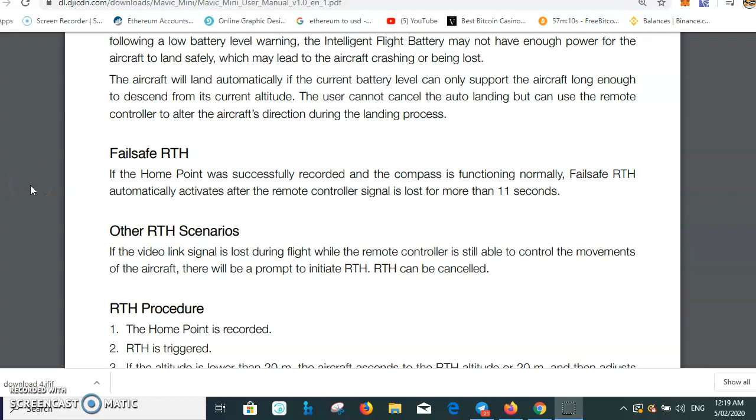Now the next one is the fail-safe RTH. If the home point was successfully recorded and the compass is functioning normally, fail-safe RTH automatically activates after the remote controller signal is lost for more than 11 seconds. I've actually tried that myself, turning the controller off and timing it. It was pretty close to 11 seconds and it did return home, so the function works.

Other RTH scenarios: if the video link signal is lost during flight while the remote controller is still able to control the movements of the aircraft, there will be a prompt to initiate RTH. RTH can be cancelled.

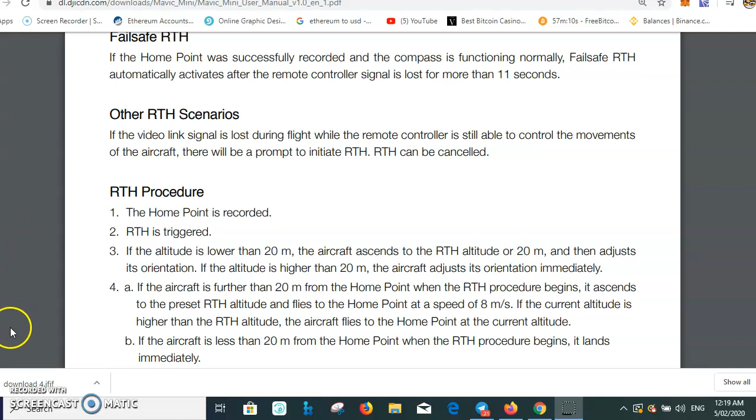This return home procedure applies to the three above: smart RTH, low battery RTH, and fail-safe RTH. Number one, the home point is recorded. It's always very important when you start up that you make sure your home point is recorded, and if you move with your controller from your home point, make sure you update your home point.

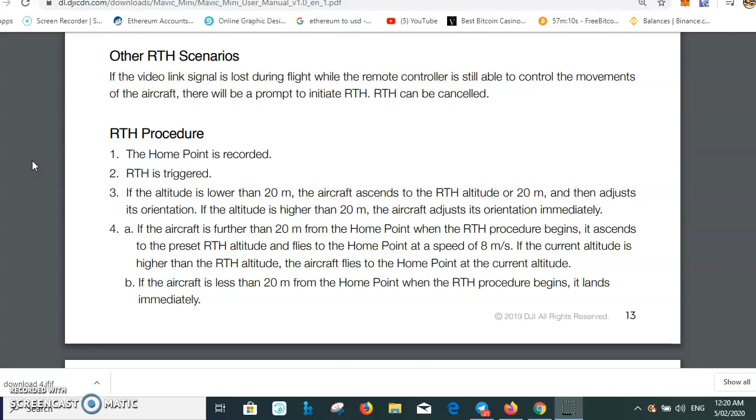Number two, RTH is triggered. Number three, if the altitude is lower than 20 meters, the aircraft ascends to the RTH altitude, or 20 meters, and then adjusts its orientation. I think the default is 20 meters, but if you've set a different return home height, that could be different than the 20 meters.

If the altitude is higher than 20 meters, the aircraft adjusts its orientation immediately. Number four, if the aircraft is further than 20 meters from the home point when the RTH procedure begins, it ascends to the preset RTH altitude and flies to the home point at a speed of 8 meters per second. If the current altitude is higher than the RTH altitude, the aircraft flies to the home point at the current altitude.

Now this is the big important one here. I've noticed on a few videos people have come into a bit of grief, especially on their first or second time out, and they get panicky and don't realize what they're doing, and things turn bad on them. If the aircraft is less than 20 metres from the home point when the RTH procedure begins, it lands immediately. I'll read that again: if the aircraft is less than 20 metres from the home point when the RTH procedure begins, it lands immediately.